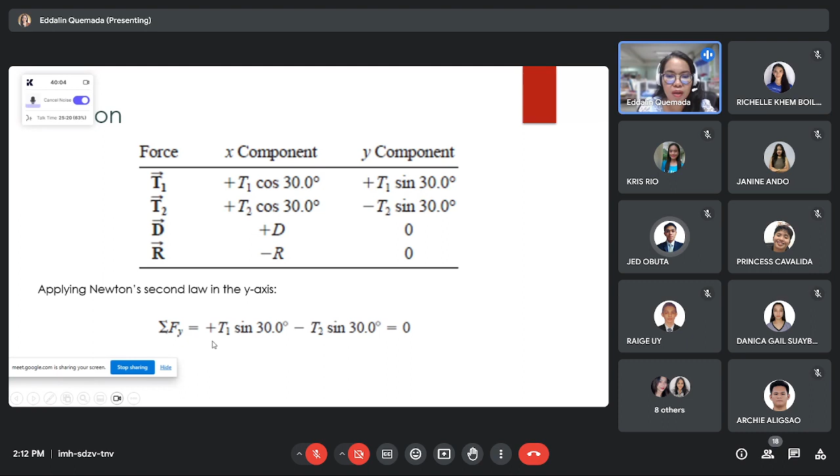Wala na, that's all. Correct. So putting this now into an equation, we have here the summation of forces along the x: x component of T1, x component of T2, both positive, plus D minus R. Why minus? As mentioned by Jed, it's directed to the west, negative in direction, so it bears the negative sign.

And again, I'd like to ask, if we check the motion of the given supertanker, and now that we have already analyzed the summation of forces along the x-axis, is there an acceleration at this given axis? Does the object accelerate relative to this given axis? Yes or no?

Miss, the acceleration is along the x-axis. So it's along the x-axis, right? Yes, miss. It's actually along the x that it accelerates, right? Yes, miss.

Therefore, if we put it now into an equation, summation of F of x is equal to ma. We now use the second law of motion, or the law of acceleration, to represent the summation of forces along the x-axis. Again, summation of forces is equal to m times a. Ma'am, why is it equal to m times a? Because there is acceleration relative to that given axis, F is equal to m times a. The 'a' here signifies that the body indeed accelerated along that given axis.

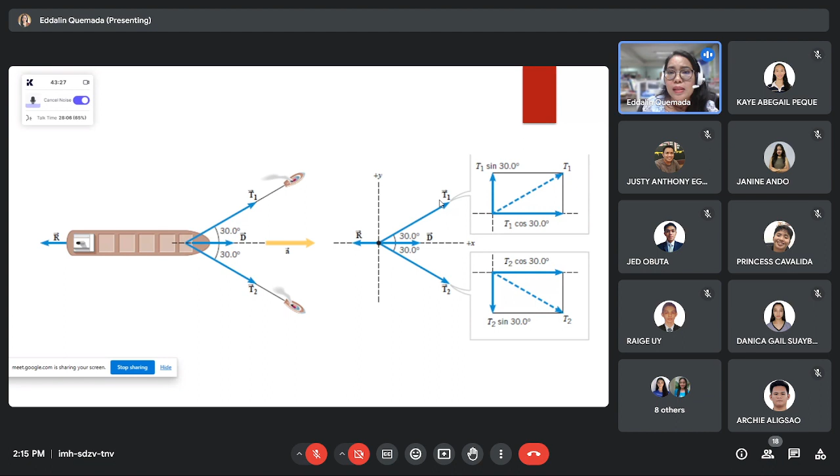Summation of forces, class, along the y this time is equal to 0. That's how we will now analyze then for the y-axis.

So ma'am, let's proceed, the question now is the value of T1 or T2. Where is it best for us to use the summation of forces? Is it along the x or along the y?

If we go back in the problem, are we given the value of acceleration? Isn't it given? Let's check. Given, no? There it is. The value of acceleration is 2 times 10 to the power of negative 3 meters per second squared.

So that means we can use then the summation of forces along the x, which is equal to ma, to solve, class, the unknown, which is T1 and T2.

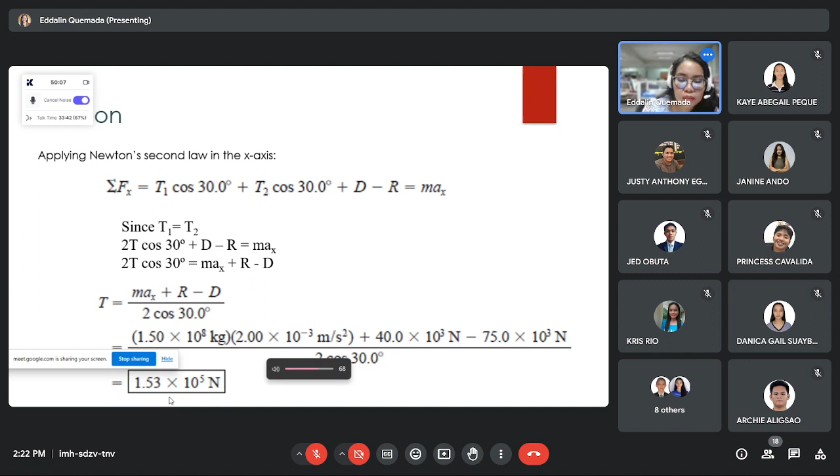Okay? Is it clear, class? Yes, ma'am. Okay, do you understand? Is there any question on the first example? Hello? Yes, ma'am. Okay, sige. Shall we proceed to the next example? Yes, ma'am. Shall we proceed? Yes, ma'am. Proceed. Sige. Okay.

Let's now have class example number 2 or problem number 2. Okay, this time we now have here an inclined plane. Nice problem because we are now dealing with an inclined plane, just like the previous example in equilibrium condition wherein the jet plane is taking off at a certain angle relative to the given horizontal axis.

So it's similar to how the jet plane is moving in an incline, because the orientation of the jet plane is inclined as it makes a takeoff from the horizontal surface. So the situation is similar, but this time we're not talking about a jet plane, for number two we're talking about a truck that is carrying a crate.

So we have here a flatbed truck carrying a crate up a 10-degree hill as shown in the figure. As shown here, this is our truck, it's carrying a crate. So class, I want you to imagine a heavy wooden box. It could contain goods, either perishable or non-perishable, to be delivered.

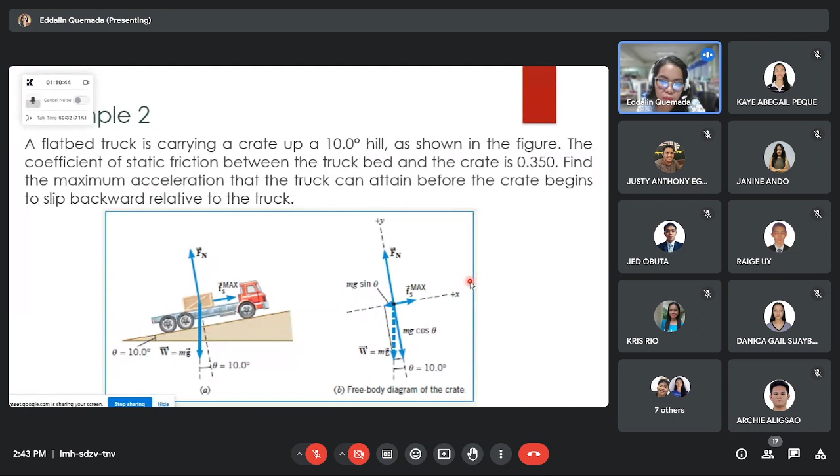Dili ba yung acceleration? Therefore, putting it into equation: summation of forces along the x is equal to m times a. And as figured out earlier, forces along the x: it's static friction minus the x component of the force weight, or simply negative mg sine theta. Nakuha, class?

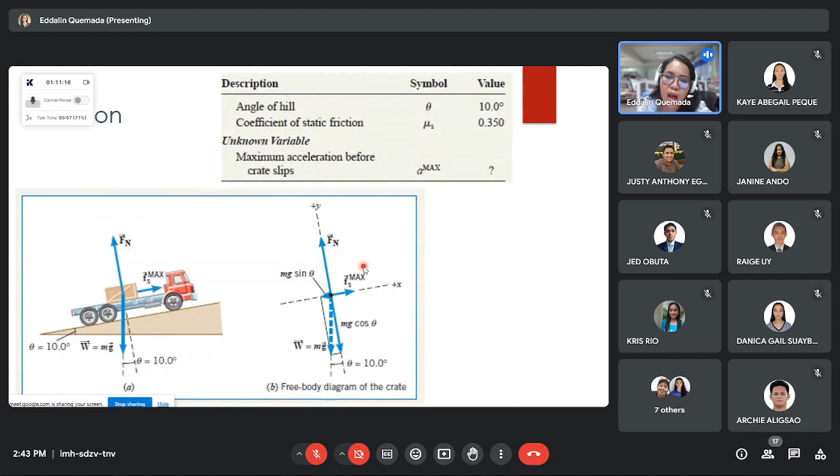How about along the y? What are the forces along the y? We have normal force, miss, normal force. Aside from normal force, along the y-axis, what else? The y component of the force weight. To which is that equal to, the y component?

Wy is equal to W cosine theta. Okay, that's equal to W cosine theta. What's its direction? What's its sign? Negative, because it's along the negative y-axis.

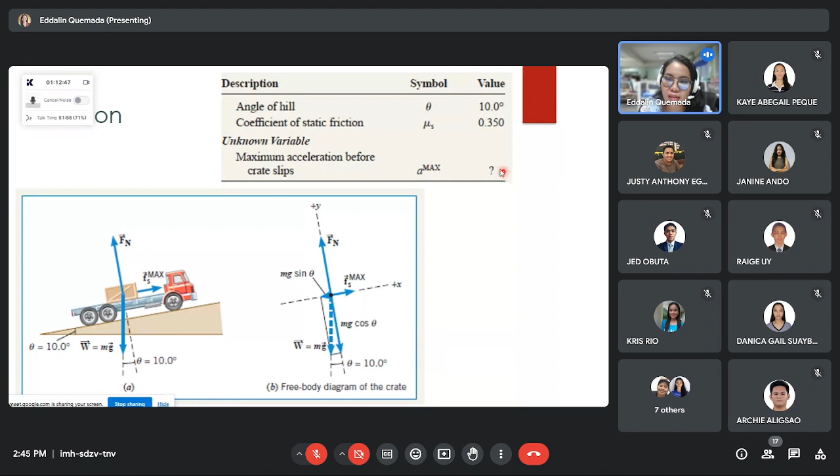Okay, next question: Na by acceleration along the y? Wala, wala, wala. Okay, so we can't use this analysis along the y-axis, because we're actually asking here for the acceleration, right? Since the acceleration is oriented or directed along the x-axis, therefore we just use this equation: summation of forces along the x is equal to m times a.

Okay, so again let's continue. Therefore we need to find the acceleration of the truck just to cause the crate to move backwards. Since we're looking for A, rearrange the equation. Therefore A is equal to F over M, or summation of forces along the x divided by M. We've identified the forces along the x, which is static friction minus mg sine theta, divided by M. Okay, and again as a review, what's the equation for static friction, class?

Fs is equal to... static friction, class? Fs is equal to mu s times... as we reviewed earlier... mu s times... what is this? Force normal, normal force.

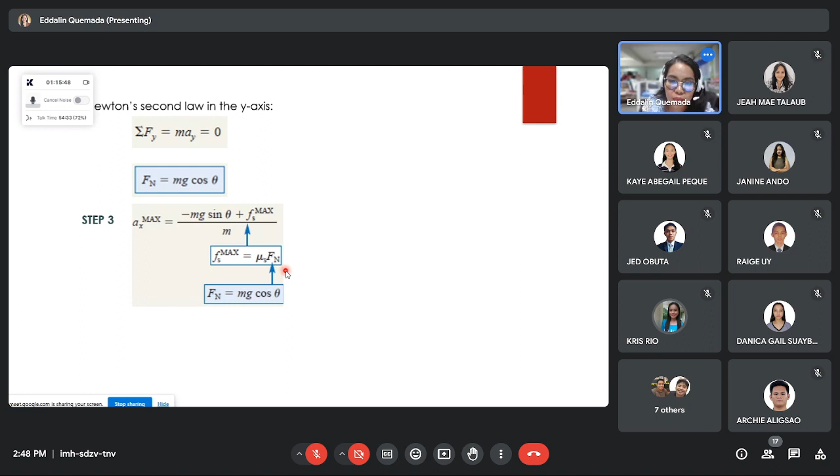Is it clear, class? Yes ma'am. So now let's substitute Fn. So to continue, we have negative mg sine theta plus the coefficient of static friction multiplied by the normal force, which is mg cosine theta, divided by m.

We can see here, class, similar terms being divided, so we can simply cancel the mass. So what is left will be negative g sine theta plus the coefficient of static friction multiplied by g multiplied by the cosine of the angle. This is how we get A.

So substitute the magnitude of g, that's 9.8, multiplied by the negative sign, multiplied by the sine of the angle, which is 10 degrees, plus the coefficient of static friction, that's 0.35, multiplied by g, that's 9.8, times the cosine of the angle, that is 10 degrees. Putting in these values, do the math, do the given operations. A therefore is positive 1.68 meters per second squared.

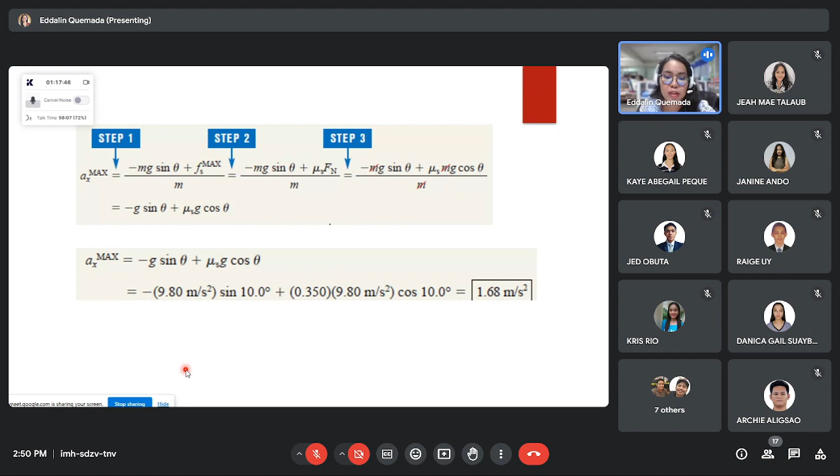Okay ra. Sige. Okay. We proceed, class, to the last example. I have prepared for you 3 examples so you can see different cases or different conditions for non-equilibrium. Okay, kanindot na pod ni class.

Inclined pod ang plane pero naay pulley. Para sa atong experiment nga nigamit ug pulley, katong naay block of wood nga birahon sa katong slotted weights, pareha ani siya. However, ang atong plane diri is not horizontal ang surface. It is inclined. Okay? So I want you to listen so you can follow this given problem.

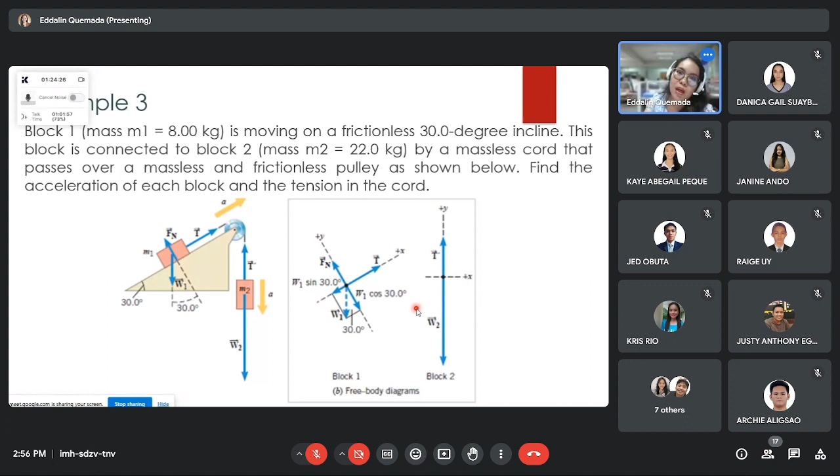Pareha atong super tanker, right? Gibira sa duha ka tugboat. Unya, wala gi-mention sa problem nga ang cord class nga nagbira sa super tanker, di ba duha man to ka piece? Wa man to nag-ingon nga lain-lain ang klase nga piece or cord ang nagbira. Unya ang nagbira pareho ra nga tugboat.

So ang kakusgon sa tugboat nga nagbira sa imong super tanker, we can assume it's just the same. So tension T1 and T2 sa problem are the same. Pareha pod ani, because in fact in this problem class the two masses are considered as one system, since they're just connected by the same cord, usaray ka klase nga cord or rope nga nag-connect nila.

And there's no friction to oppose the motion of the two objects. Therefore, the tension acting on mass 1 is actually equal to the tension acting on mass 2. Equal ang T sa M1 ug M2 at the same time their acceleration. So atong i-solve karon, duha man ka object, dili pareha sa other problems nga usa ra ang object nga atong gi-analyze.

Well, that's not a problem, class. Kay duha man ka object, we have to draw two free body diagrams. Duha ang free body diagram nato kay duha man ka object. And di magguol kay sa kada free body diagram naa gihapon ang tension present. Ang duha ka tension parehas ra man, so makombine na gihapon nato ang mga expression or equation, right? So before we deal with those equations, free body diagram sa ta.

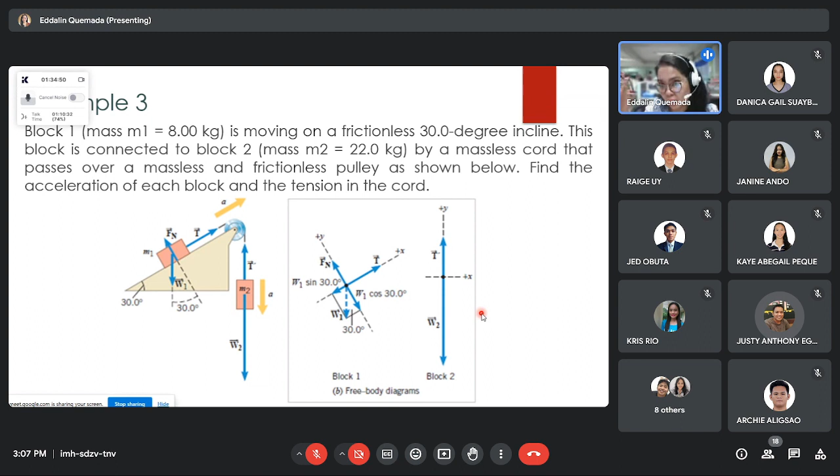Are there forces acting along the x? Back to the FBD - is there a summation of forces along the x for block 2? None. Okay, since it's suspended, it's hanging, so there are no forces along the x.